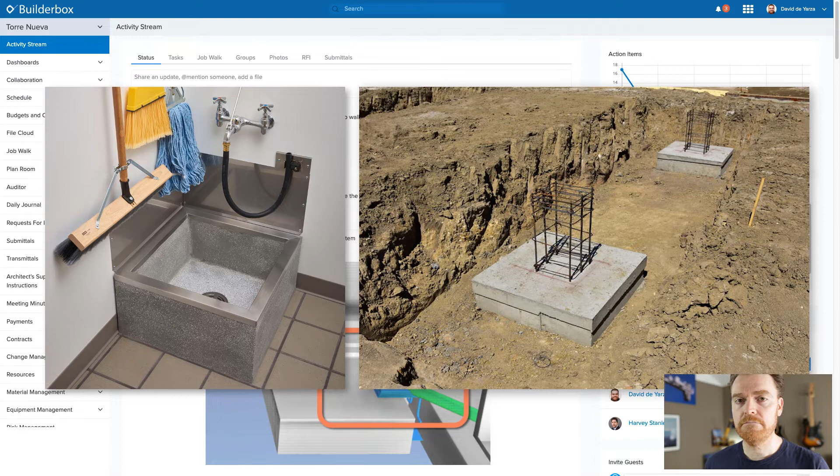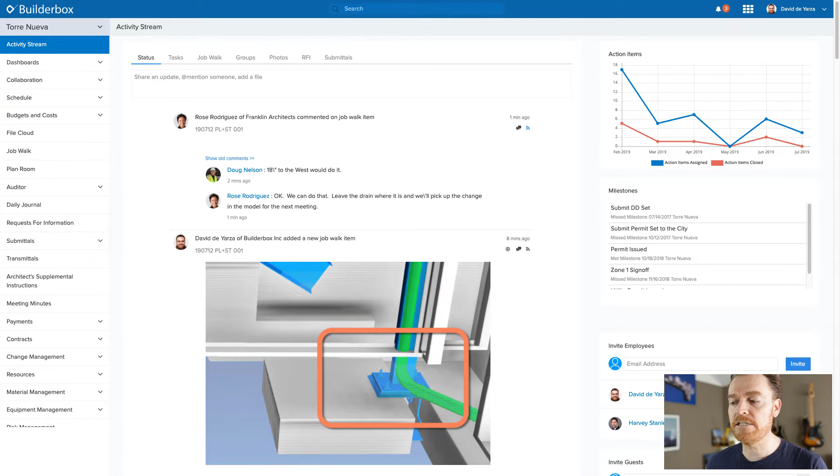So quick trivia question. What do this mop sink and these foundation footings have in common? Of course, those of you who spend a lot of time doing VDC coordination already know where I'm going with this, right? But of course, Murphy's Law states that any mop sink on the third floor must have a drain that comes down exactly over a foundation footing. Bet you didn't know that. But let's go ahead and take a look at how we would deal with something like that in Builderbox and why the Readiness Index really helps us out.

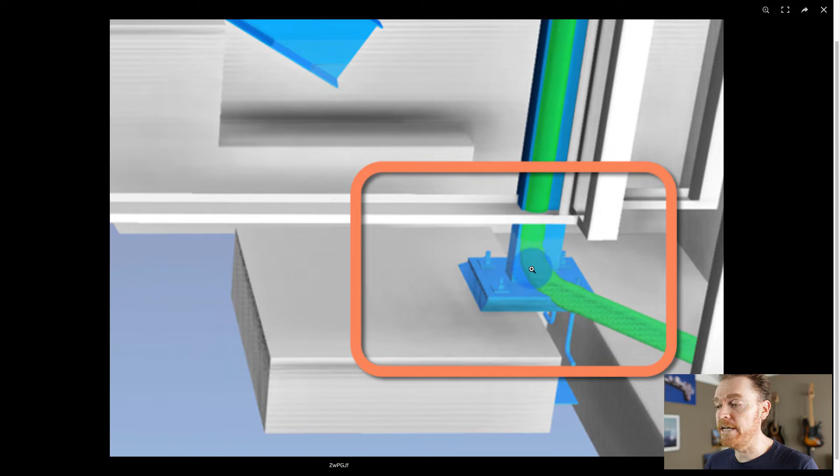So here in Builderbox, I've got a job walk, which is what we are using to manage the clash detection in this particular project. And I can see that we had a coordination meeting and somebody said, hey, wait a minute, this drain coming down from this room, well, it's clearly encroaching in where our foundation needs to be for our post for our steel staircase. We need to move this drain, right?

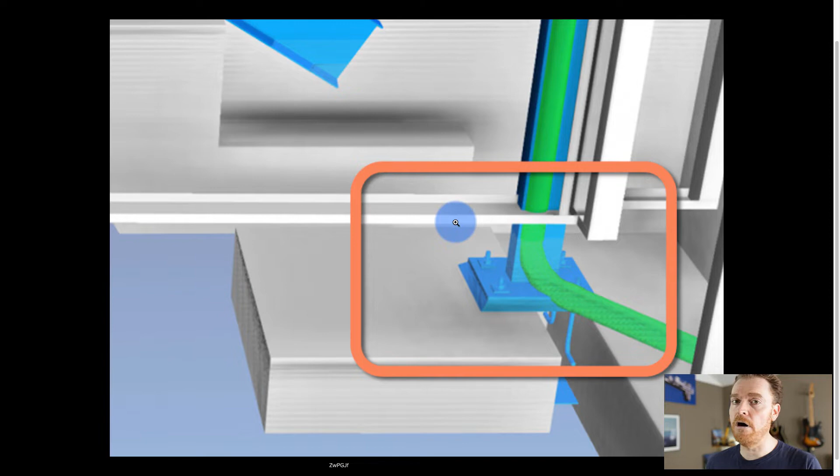And everybody that is involved with this particular issue doesn't always talk to one another. You know, the guys that are out there in the field getting ready to pour this concrete might be part of the coordination, but that's not their realm. That's not their silo. So how do we get this information to them in a way that doesn't make them come into the model, doesn't make them become experts at what we're doing, right?

So using Builderbox over here, what we're going to do is notice that after this clash got posted, there's been a bunch of collaboration going on over here. Let's take a look at this thread. So it looks like our plumbing foreman, Doug, he's taken a look at this, and there's some reason, probably a pretty good reason, why this particular drain cannot move.

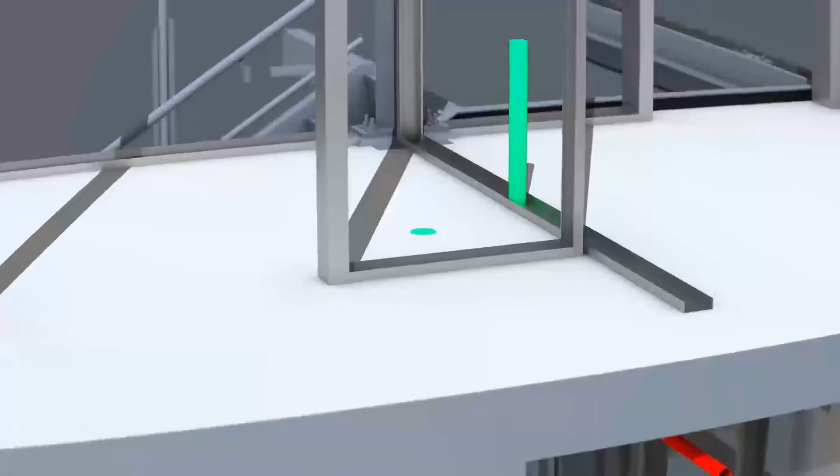I'll give you a little insight on this story. It actually was a piece of plumbing that was coming down through a pretty congested area, some pretty challenging conditions having to do with this particular issue. Long story short, we decided to move that footing over. It wasn't a big deal. It was something that could still be done. And the story needs to get out to the foundation guys, right? So let me show you how easy it is to add this to that activity's Readiness Index.

Check it out. I'm going to go into my schedule. And here in my master project schedule, I see that I've got an activity for Foundation Zone A. That's what this particular foundation belongs to. And I'm very simply going to come in here under the Information tab, and I'm going to add a new document to this particular activity. Let's take a look at Job Walk.

So here we go. This is our clash, and I will go ahead and add it. So just like that, I have attached this Job Walk to the schedule activity. So now whenever I do a readiness query for this particular activity, I will see, in this case, this job walk is still open. So even if I'm not in the model, even if I'm not looking at the plumbing package, even if I have no idea that this is going on, if my task is to pour these foundations

and I come into the schedule and I take a look at the readiness index, I can see that there's a big fat red circle here. Chances are that I probably should be looking at something here. So let's take a look. I'll go back into my Information tab and just click on the item. And this will pop open over here.

I can see what the original issue is. I can see the entire thread of conversation about this. And now I know that there's something that I need to pay attention to here before I am done with it. Now I happen to know that this footing is able to move and that we've already done the work on figuring out where it's going to go and that it's going to be fine.

So I can come in here and go ahead and say, we've taken care of this and it is okay. So I'm going to go ahead and close this item out. And when I do that, I'm going to have a digital audit trail of the fact that I did that. But more importantly, when I go back to my plan, my readiness index for that particular activity for Foundation Zone A is now green. I am ready to proceed.

And it's not just VDC or job walk items that I can use here. I can link anything from Builderbox. So the status of an RFI, for example, or a submittal, or the approval of a change order, or even the completion of a checklist. These are all things that I can use to inform the readiness of a particular schedule activity.

And to take this one step further, it is not just project documentation or information that I can use to perform this readiness analysis. I can take a look at everything that affects this schedule activity, like dependencies from other schedule activities, which of course most scheduling packages already do. But I can also take a look at my workspace, make sure that it's accessible, make sure that it's available, it's not double stacked. Are there safety requirements that we need to do for this particular activity?